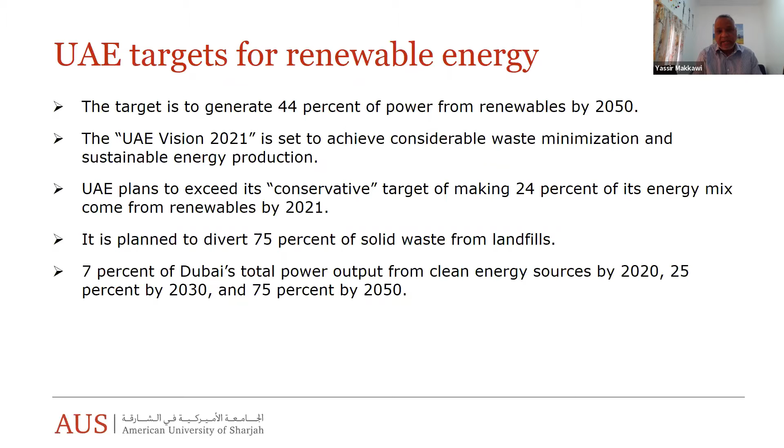So these are just giving you an outline of the vision of the UAE, and the driving force behind our research is to address these issues of waste minimization and renewables. Of course, the UAE is a petroleum country and rich in energy, but addressing renewables is to diversify energy sources and also to minimize CO2 emissions. So it's not only to provide an energy source, it is also addressing environmental issues and diversifying and securing diverse energy sources.

So one of the main questions that may come to anyone listening to this is: what are the waste materials in the UAE? In the West, they are very rich in green waste, plantation and forestry waste, agricultural waste, and so on. In regions like the UAE, arid and semi-arid regions, we are in a desert environment. One of the issues we need to tackle is to identify the sources - first, what is the waste, and also what are the other sources of organic waste? Because when we talk about waste to energy, we are talking about organic waste.

One of the things we first looked at is agricultural waste. As we all know, the UAE is not an agricultural country, but we have a huge amount of date palm waste, estimated to be 1 million tons per year. The other organic waste in the UAE comes from municipal solid waste, household waste, and sewage sludge. The estimate is 2.9 million tons per year of municipal solid waste, around 2 million tons of which is from households.

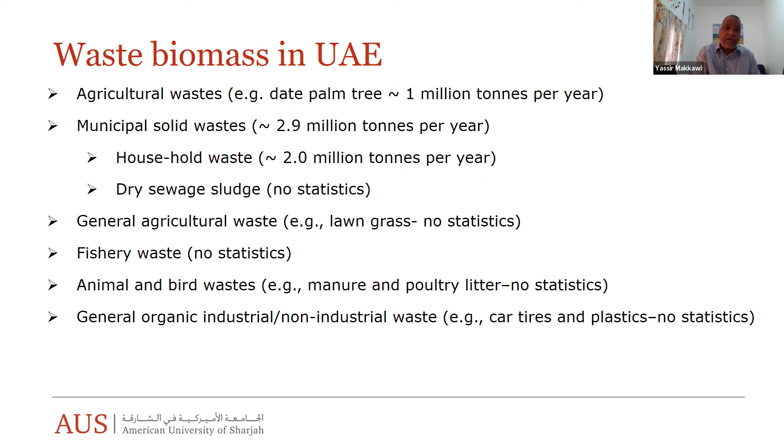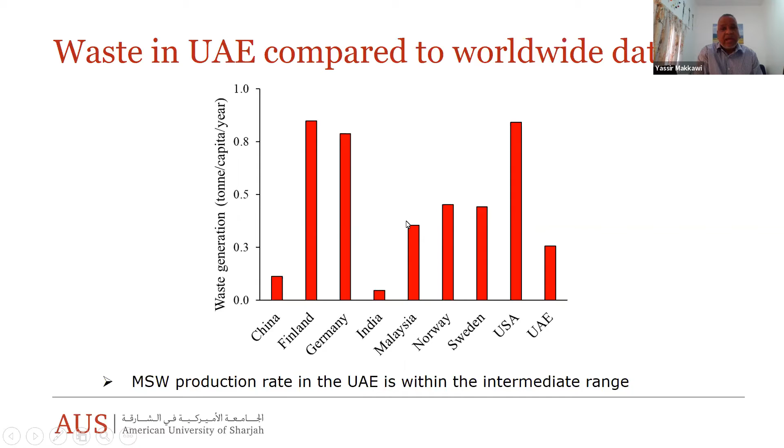However, when we look specifically at food waste, which is part of municipal solid waste, the UAE interestingly comes out as the highest among the top waste producers in terms of food waste. By food waste here I mean discarded or leftover, post-consumption waste, what we discard after eating our meal. In terms of total production, shown in red, the UAE's production is quite low, but per person, because of the population, it is strikingly high at 0.21 — the highest among all countries we looked at. This is well documented in the literature: the UAE has high food waste, mainly going into landfill.

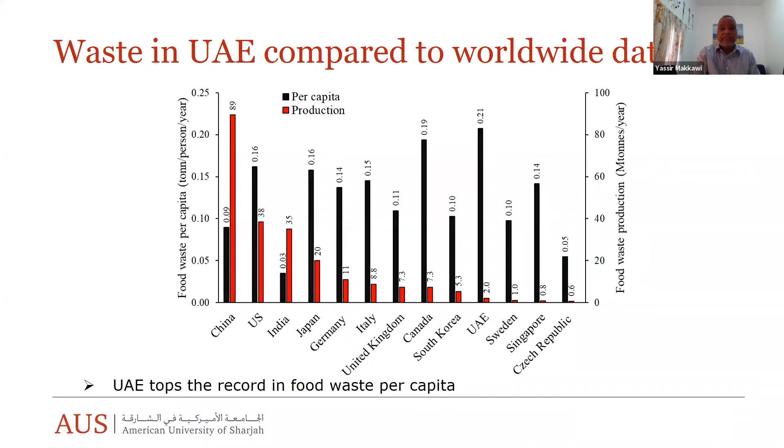So that is the waste statistics we have in the UAE. The question is, how is waste to energy done? What is the process needed to convert our waste into energy? Here I'm showing a flow diagram, or schematic, of how this is done. Imagine you have your waste, like any organic waste — food, paper waste, residues from agriculture — any organic waste, we can just call it biomass. When you heat it up, it produces a gas.

We call this pyrolysis if it is done in an inert environment, like in a controlled environment with nitrogen around, producing pyrolysis gas, which are the volatiles inside the organic matter, coming in the form of gases and tar. The result of converting the biomass is char, a solid black material, which has great potential in soil amendment and as a solid fuel, because it can also burn further to produce energy, like burning any woody material with fewer volatiles.

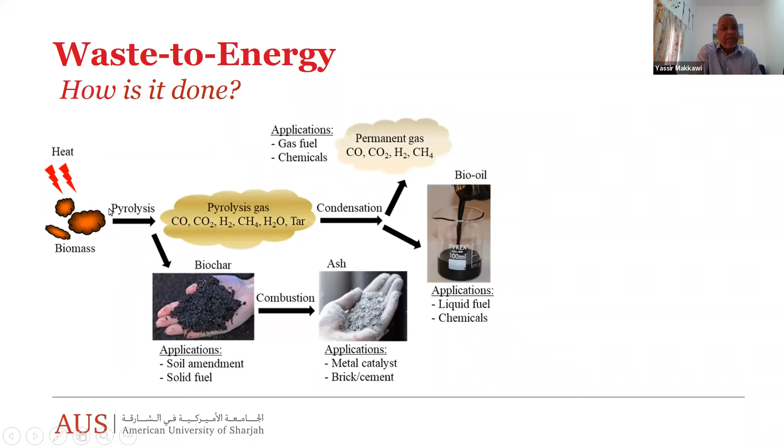If the char is burned further, as I said earlier, you can burn it and get energy, and the result will be ash, which is mainly the minerals or metal content. This has got uses in catalysis, the cement industry, agriculture, and energy. So you can see diverse products we get from simply pyrolyzing the biomass.

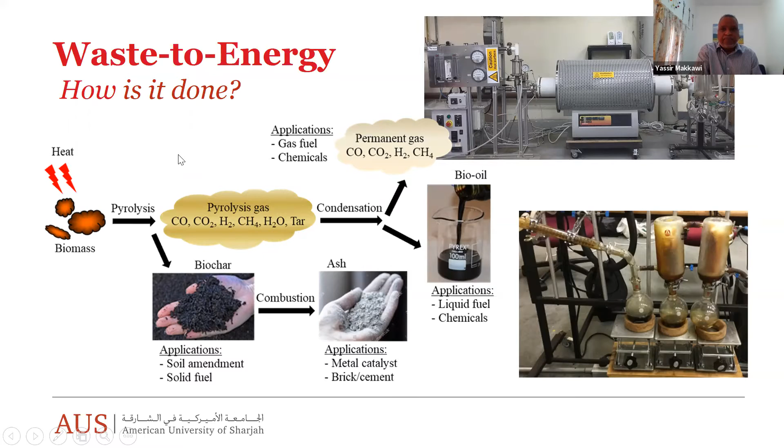This is the system we are running in our labs. This reactor can process nearly half a kilo of biomass in 1 hour, so it's a relatively small scale - 500 grams of biomass per hour. I have to mention the temperature we usually operate with is around 500 degrees.

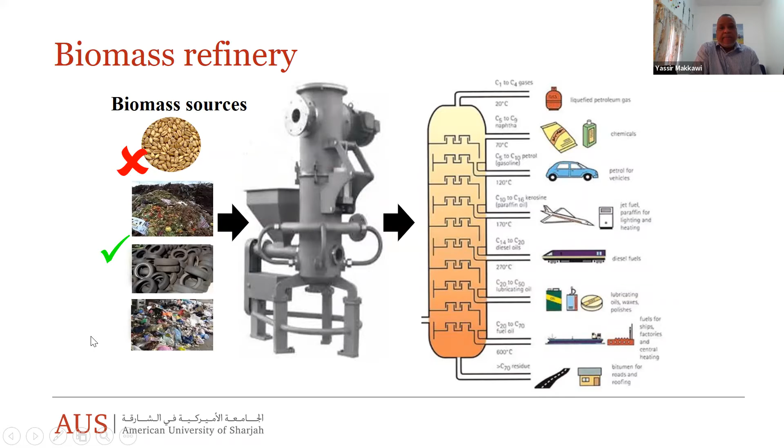I'll start talking by looking at the first case we are considering, which is food waste. As I mentioned earlier, food waste is the highest waste we have here in the UAE in terms of production per person, so it has potential to be utilized and diverted from landfill.

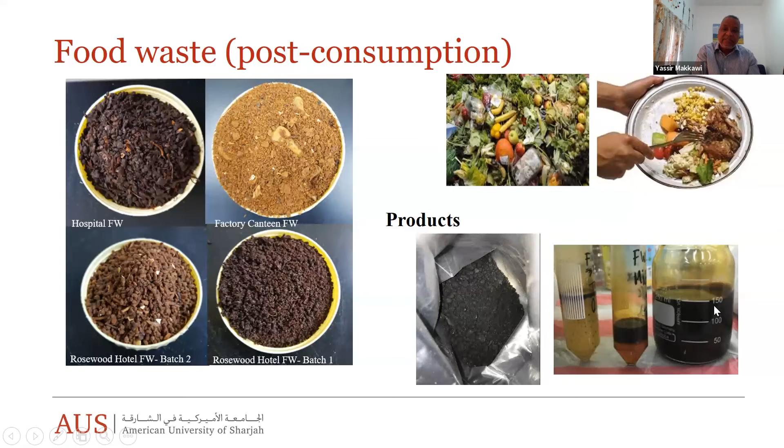This is the kind of typical product we use. We produce char, which we have great hope is going to be very useful for the UAE as a fertilizer - UAE spends millions of dirhams every year on fertilizers. And this is the oil we produce. As you can see, there is a light fraction, a mixed light and heavy fraction, and this is the heavy oil, just like a typical crude oil.

So as I said, we wanted first to make sure the varieties of feed are not so critical to affect our end products. We analyze, and always analyze, all the feedstocks before we process them in our reactors to produce the fuels and energy.

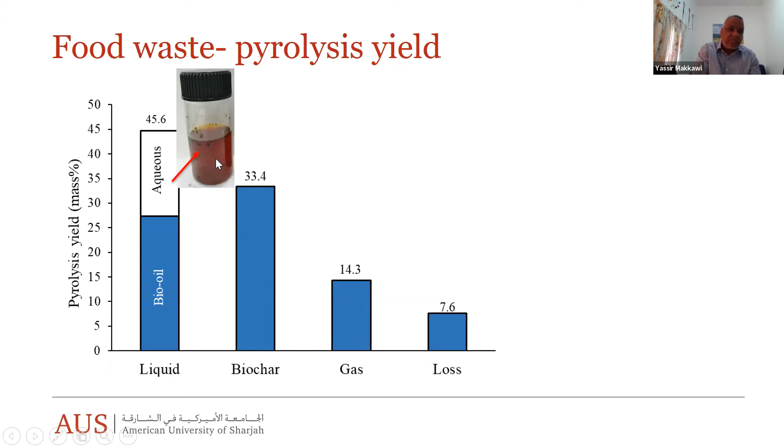So this is the typical appearance of the aqueous phase - as you can see, it's a reddish, light color with a majority, 70% or more, of water. And this is the bio-oil, which is heavy, black, dark like crude oil, and has only about 10% water in it - reaction water coming from the process - and has a very high heating value compared to the aqueous phase.

Of course, the aqueous phase has no value at all - when we actually measure it in a bomb calorimeter, it has no heating value. The bio-oil has a reasonably good heating value, as I will mention later on. As for the gas, we analyze it using gas chromatography, GC.

If we go to higher temperature in the process, above 500 degrees, like 700 degrees, then we are going towards gasification, which prefers formation of gases. But when you limit your temperature around 500 degrees, you are actually maximizing your oil. If you go to high temperature, you risk breaking down these heavy hydrocarbons and converting them to further gases, which is not desired in pyrolysis if you are targeting oil.

Heating values: this particular bio-oil from food waste has got 28, which is around half of the heating value normally found in crude oil. Biochar has got 26 megajoules per kilogram, and gas has 12.4.

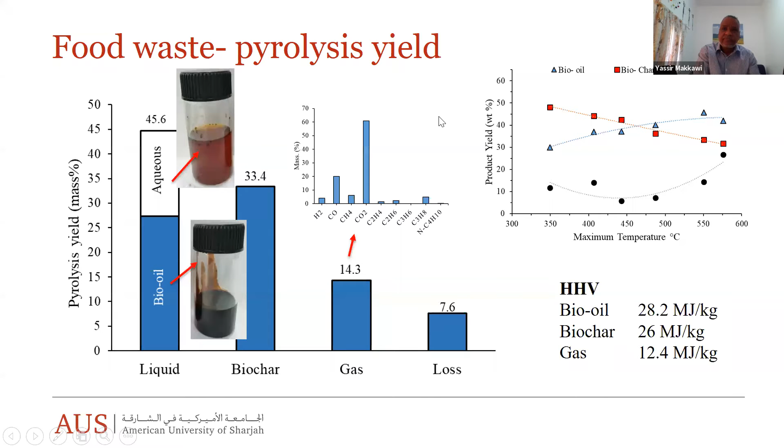If you go extremely low, like 350, you get much lower oil and higher char and less gas. As you increase temperature, the char decreases because you are releasing more volatiles. The gas increases as you increase the temperature, but the bio-oil has an ideal maximum here. For this feedstock it's around 550.

We also looked at date palm. We looked at the three main parts of the date palm waste. As you know, the UAE produces millions every day and every year, and each tree produces around 40 kilograms of waste every year. So you can imagine, with millions of trees in the UAE, and not only in the UAE but in the Gulf, each one producing 40 kilograms every year, it's a huge amount of waste. Currently it's only disposed of by landfill or burned in an environment unsafe to the environment.

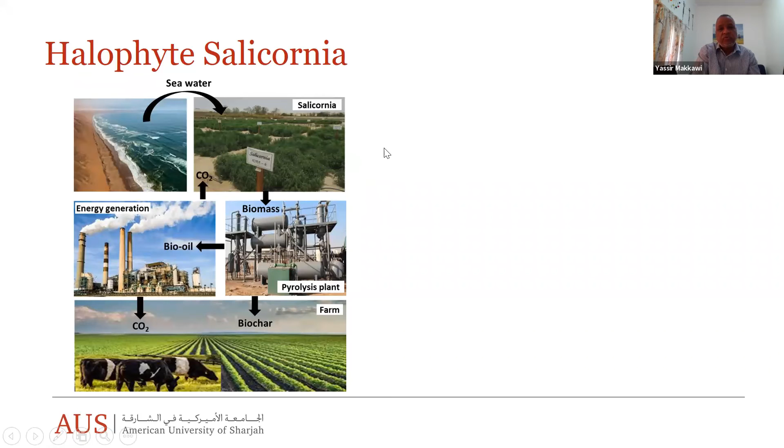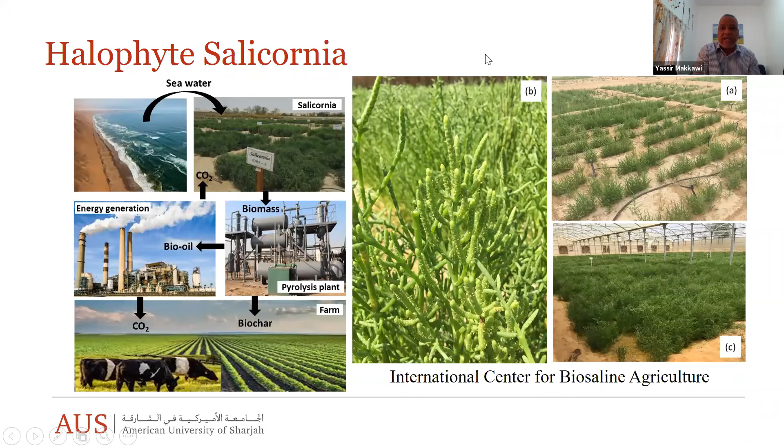So we tried both the seed and the seedless plant, which is completely waste. The seed has got other uses, can be used for oil extraction and so on, but we also looked at it as a source for biofuels. So we use the Salicornia to get two different feedstocks, the seeds and the seedless plant, and this is how they look after we grind and dry them.

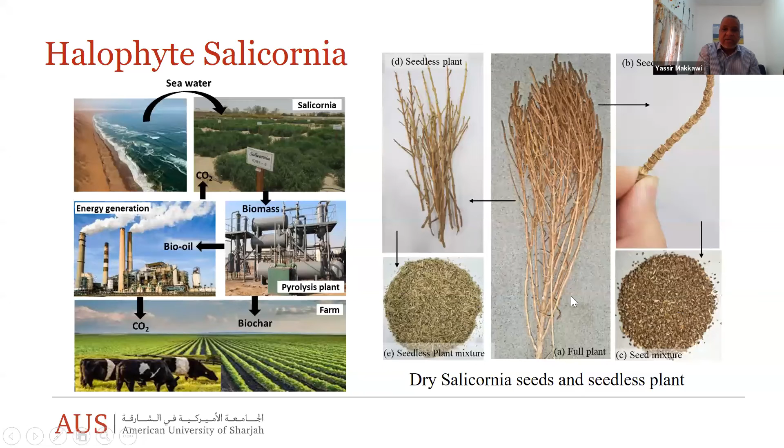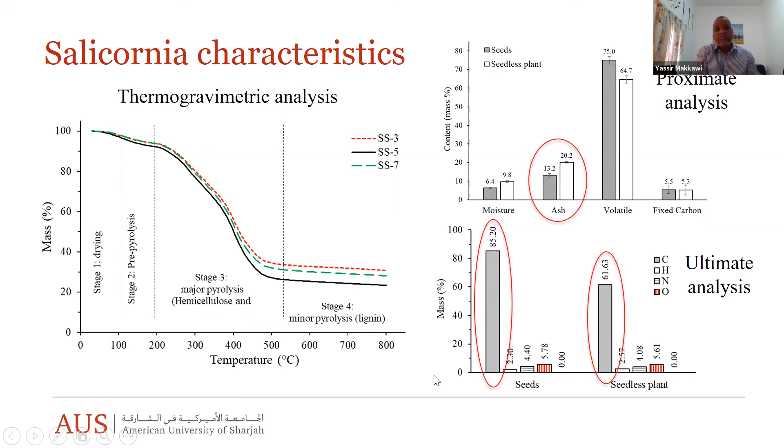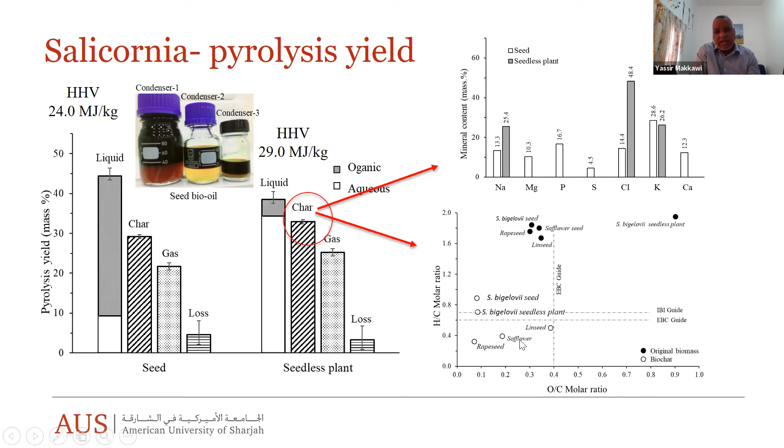We can see for other feedstocks, we looked at other materials and seeds that produce biochar, like rapeseed, safflower, and linseed. All these we compared to the Salicornia seeds. We can see the Salicornia seed is not far from the box here, which suggests it has potential to fall into the category of biochar for soil.

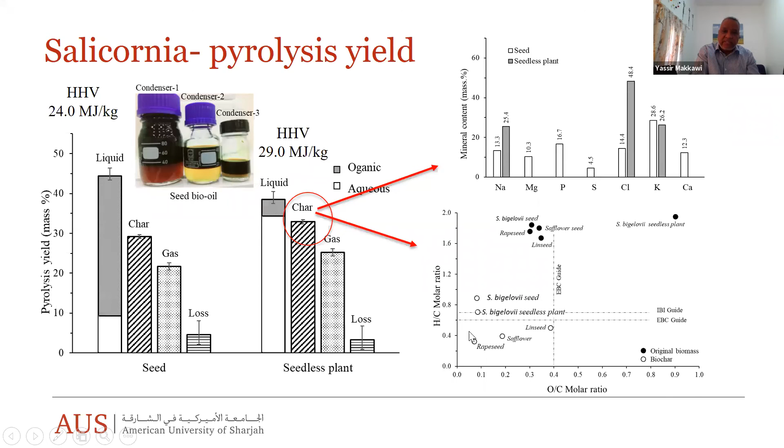While if anything is falling outside, this is the original material, the biomass, originally the hydrogen to carbon and oxygen to carbon. It's far away from the box, but when you convert it to biochar, you are carbonizing it, making it into carbonaceous material which has got potential for soil amendment. So it has good potential. It is falling near the box here.

The fact is, in the reactor it is getting squeezed by the screw, and the oil that we produce in the beginning of the process acts as an agglomerating agent and increases the size of the biochar product.

No one has looked at this before, this kind of research. This is a very novel study, the first of its kind in the world, actually, to look at Salicornia in this detailed way.

Also, some of the parameters we are interested in is the bulk density, because if we are applying it in the soil, we want to see the bulk density, and it is reasonably low, which is advantageous for soil application.

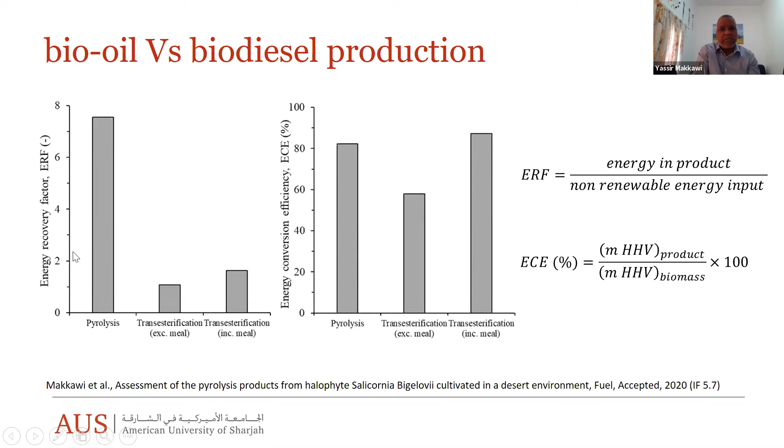In terms of energy conversion, there is great similarity in both. We are able to convert with good potential, good recovery, good efficiency in both cases. They are reasonably comparable, but the most striking result here is the energy recovery factor.

Finally, I would like to say a little bit about a novel concept. So far, the most critical thing in bioenergy is the expense of driving the reaction. One concept we are trying to develop is having the whole process driven by solar thermal energy, heating the reactor by solar energy instead of fossil fuel or the biomass itself, since these are the two current options to drive the reaction. If we are successful in driving the reaction by solar energy, we are making a breakthrough and competing against fossil fuels. So far biofuel is expensive compared to fossil fuel, but doing this will make it more attractive and more profitable.

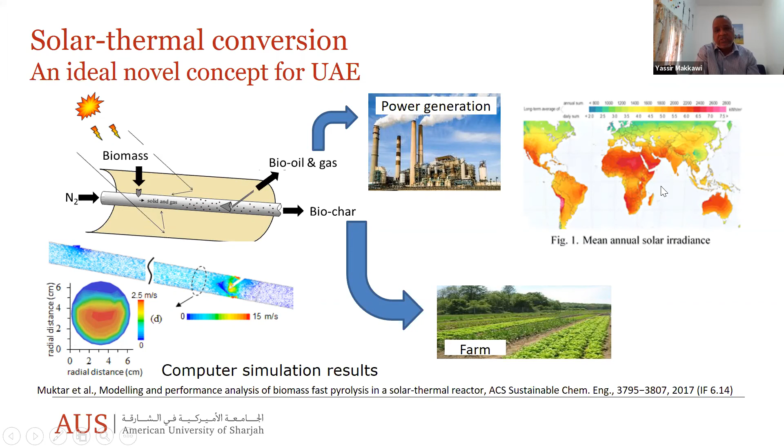This study we carried out numerically, by computer simulation, but we are looking at experimental validation. The reason for this is that we are in the region of the hottest part of the world, the Middle East, so solar energy has great potential here.